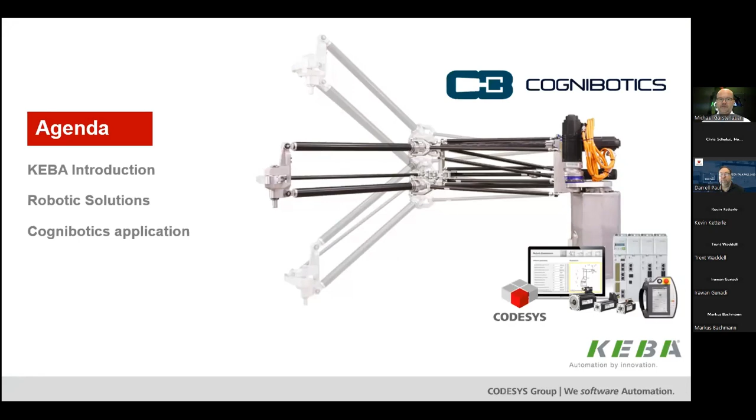So without a repeat of the introduction, what we're going to do today is give you a short KEBA introduction to who we are, the robotic solutions itself, which includes how CODESYS is interfacing with our control system around robotics. Then we'll get into the actual Cognibotics application and how we helped this customer be successful within robotics with our capability and CODESYS.

KEBA has actually been around since 1968. We export about 87% of the products we make. We're located in 16 countries with 26 locations, and we have over 500 million euros in sales each year.

The two important things we want to emphasize today are the fact that we reinvest our revenue at a rate of at least 13% in R&D each year, because this is what helps us live by our logo under KEBA: automation by innovation. This is really what brings us together as a team and a company. And second, KEBA is 2,000 employees strong, and the combination of those two things allows us to do a lot of nice things in the market, which you're going to hear about today.

In terms of robotics itself, we've shipped about 110,000 robots worldwide that run on our technology. We've been involved specifically around robotics for 30 years. Just this fiscal year, we believe 23,000 robots have been shipped with KEBA technology on board.

We partner with international robot manufacturers and process experts, which we'll share in the next slide. But the major thing that motivates us is that when you look at automation and the factory floor today, there's a lot of challenges around mass customization, individualization, high mix production environments, labor shortages, and how operators are interfacing both with machines and robots today. It really makes a challenging environment, and we believe that what we are doing is going to help that.

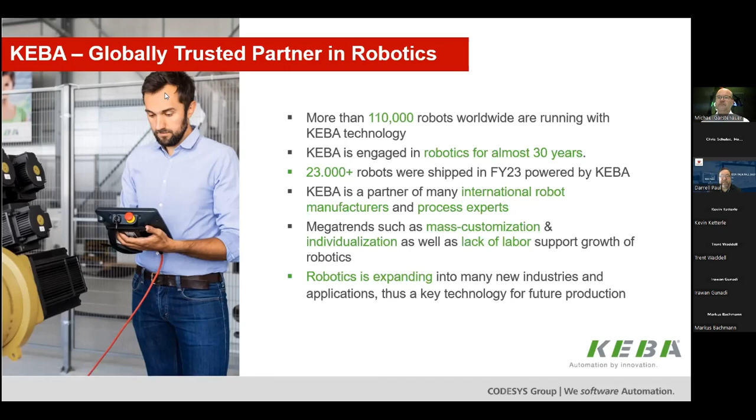And so we continue to invest in robotics and expand our capability and technology in robotics.

But we certainly want to continue to educate and share with North America who we are, probably a little bit more than I think people were aware of.

Just to give you a quick run through of what KEBA makes: one of our major products is our HMIs, with both stationary and mobile HMIs. In today's environment with robots and operators having to be very highly mobile and interface with many control systems, this is why we think it's been very popular for customers to start using mobile HMIs. KEBA has the only kind of solution for that which has properly gone through a safety rating process so it can operate safely with both robots and machines.

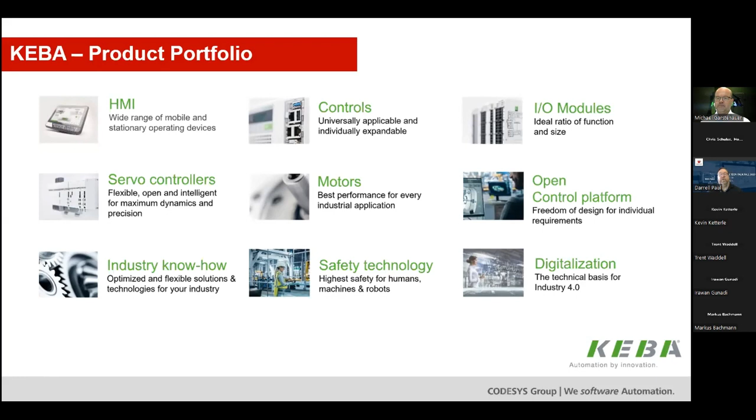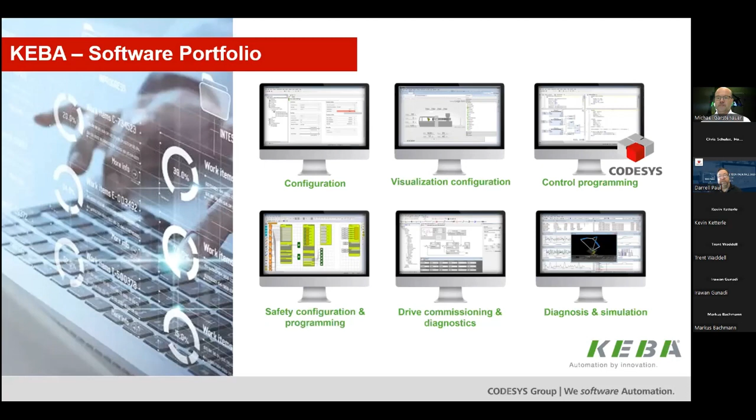So what does that mean in terms of software and the product portfolio of KEBA? Within our software suite is CODESYS, but in conjunction with CODESYS we have a lot of support programs that build it out to a complete suite. There's a configuration capability that helps you configure which targets and devices, controllers, motion products, sensor products, and networks. There's also visualization for building user interfaces, control programming which includes CODESYS, safety programming, and drive and motion control diagnostics, along with simulation and real-time digital twin capability. You'll be seeing that very shortly.

In terms of our robotic solution, what are we providing? We have a controller and drive rack all in one, as you see in the image. The first module is the control module, then we have a central power module, and then modular drive units. We can connect these to motion axes and to robots, allowing us to control those robots, including the safety capabilities and monitoring across that robot. It also lets us teach in the moves of the robot and the sequencing, and provides engineering tools around simulating a robot and running through different operation scenarios.

Within this architecture, it also provides better scalability for the customer. Most robot controllers give you one big box that controls one robot, and sometimes you can network those robots together. But with our solution, you can add on additional drive modules and control multiple robots within the same software project. This allows much better functionality and coordination across the robots, even coordination with the machine and motion systems, and you can control multiple robot types. So it provides a good, flexible, scalable solution for customers.

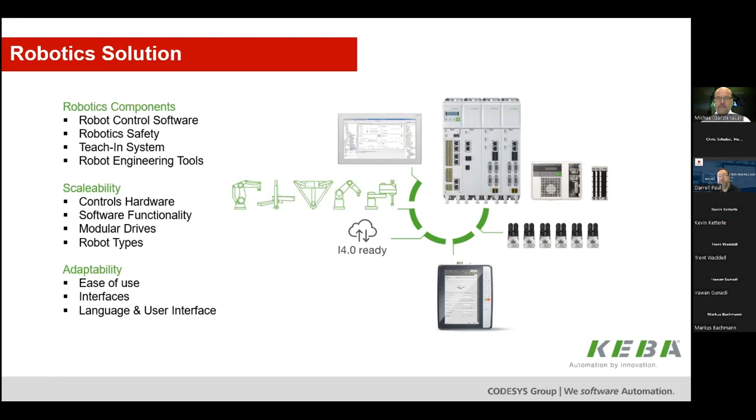From an adaptability standpoint, we really focus on our software capability being ease of use. We're implementing more and more capabilities of what people are calling programless code, or more visual-based programming, and we continue to build that out. We have multiple ways to interface with products on the machine through control networks and systems above the controller in the IT space, and we also support multiple languages and multiple user interfaces within our software package.

So what we're going to get into now, which leads into Michael's presentation, is the key capability of KEBA, what we call our FlexCore technology. We have a Linux real-time engine, and then many different types of modules that feed into this real-time Linux engine for machine control, robot control, and CNC control. This is where CODESYS comes into play, because CODESYS fulfills that PLC block you see in the diagram. With this, you can control up to 30 different types of robots, or even custom configured robots, and you can program and control up to 16 robots in one controller, which is a phenomenal advantage that KEBA has.

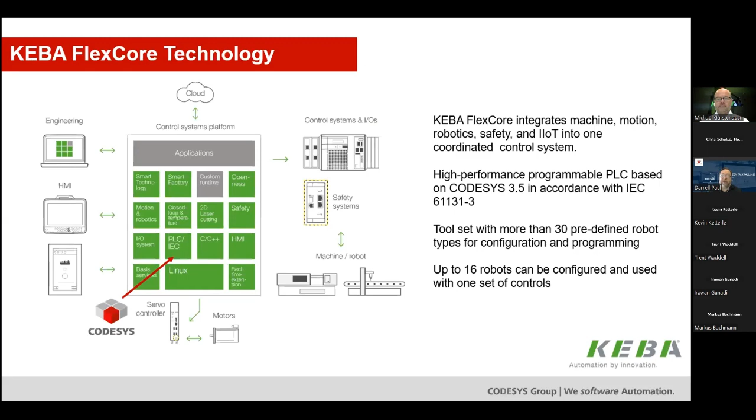The next part here is safety, because whether it's machine safety, robot safety, or motion safety, we really cover the complete spectrum. We actually bring those safety systems together so that if you have multiple robots, motion axes, or machines, it's a cohesive and coordinated safety system. We provide safe motion in terms of force, speed, position, acceleration, and recovery. From a robot perspective, we support safe area functions, safe planes, and safe TCP actions, and we can interface those two systems together so they form a coordinated safety system. So safety is a big part of what we do across all our technologies.

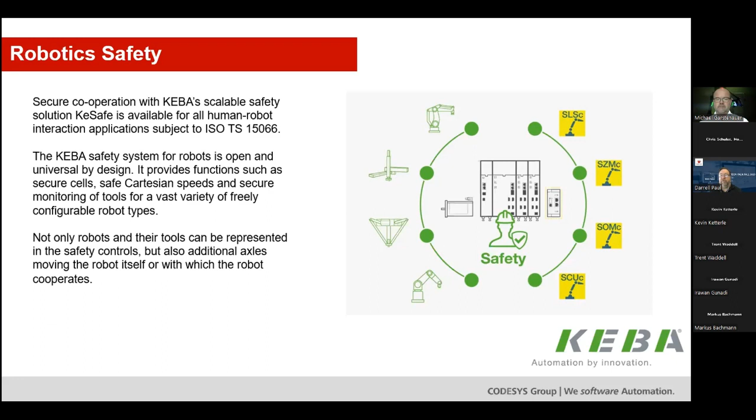All right, so this is the part where I'm going to stop here, and I'm going to let Michael take over, and he can show you all the fun stuff.

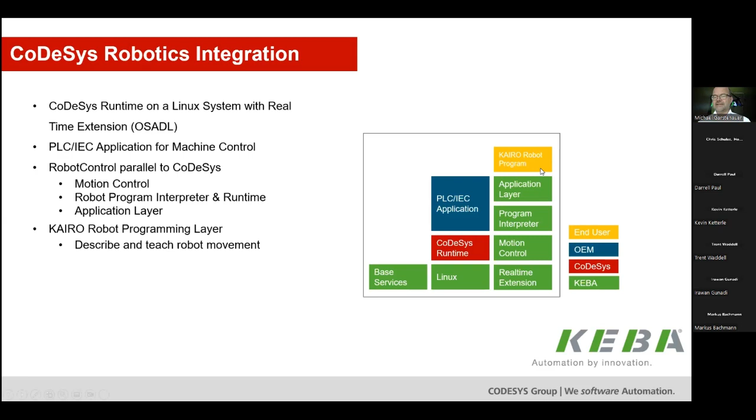And there's an application layer that allows you to define the language that we provide. Basically, we have this end user level. If you're familiar with a standard industrial robot and languages like Rapid or KRL, this is a comparable language.

The difference there compared to a standard industrial robot is that, as an OEM, you can change the application layer a lot. You can change the types of commands that are available. You can add commands that integrate your process technology, and you get an integrated representation of robot motion and process settings.

Also, you can integrate your own transformation within the motion control, and you can have all kinds of adaptations to the interface between the PLC side and the robot control side. And for the high-end geeky ones, there's of course a real-time C++ environment available for integrating deep technology on the same platform. This can also be accessed from the PLC side, and the C++ part can interface to the robotics.

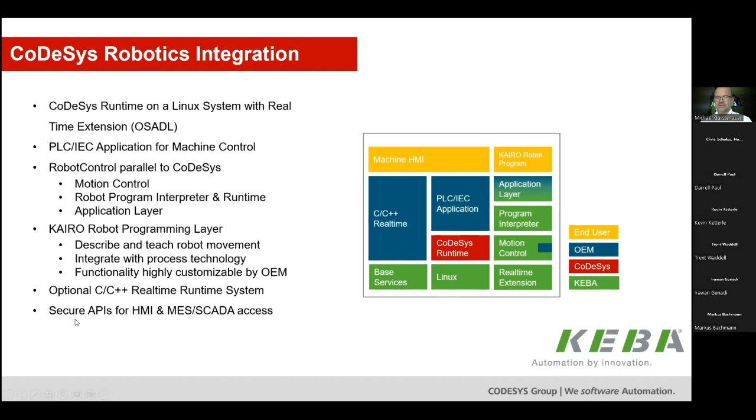So many functionalities available. All of this comes with a lot of APIs to access from outside, from higher level systems or HMIs. We are right now in the process of switching to web-based secure APIs.

So how does this compare to a regular PLC plus industrial robot setup? Typically, that's how industrial robots are deployed in most installations. There is typically some kind of field bus or network interface between the machine PLC and the industrial robot controller. We enable a more integrated approach where the machine control, the robot control, and the process control can be done on a single integrated platform.

What are the challenges of the common approach? On the one hand, you need to synchronize data and you need to manage data. For example, if you look at clouds or tool environments, you have two that have to be consistent. All the data coming from part information from your ERP system needs to influence both parts, both the PLC part and the robot part, and they might have very different interfaces and very different access possibilities.

In our system, you have one single access for all the data, for process information, for the robot parts, as well as for the overall machine workings. This is really integrated and unified, much easier to handle.

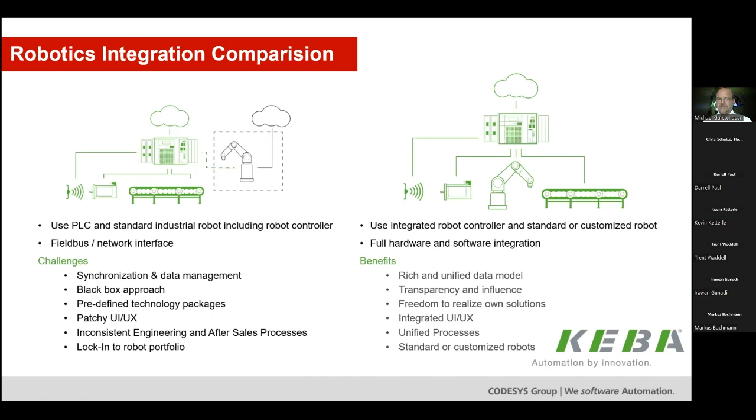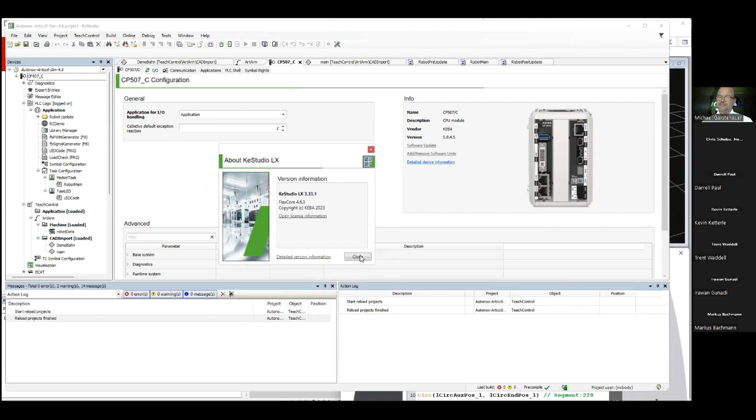So many more opportunities and possibilities to make life easy, flexible, and all the processes much simpler than in regular installations. So what does this all look like? I'd like to give you a live demo. The entry point for an integrator typically is KeStudio, which is our environment for programming PLCs, the PLC part and the robot part, and handling the entire system. So if you find this somehow familiar to what Kevin presented, this is not happening by accident.

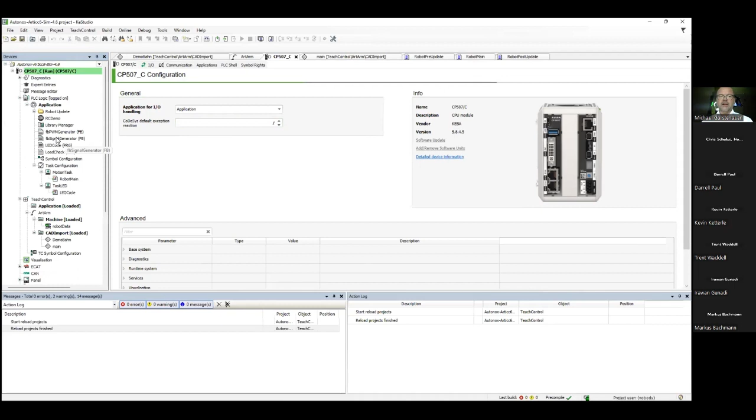This is based on the CODESYS platform. If you're familiar with CODESYS, you will find it very easy to start here. You can program just your PLC code as you're used to with many other systems.

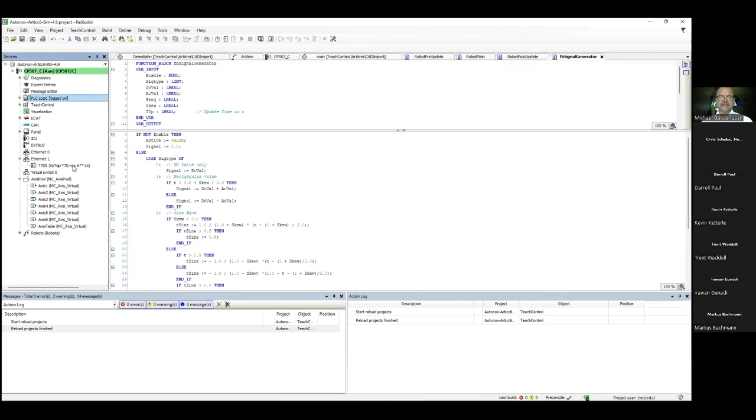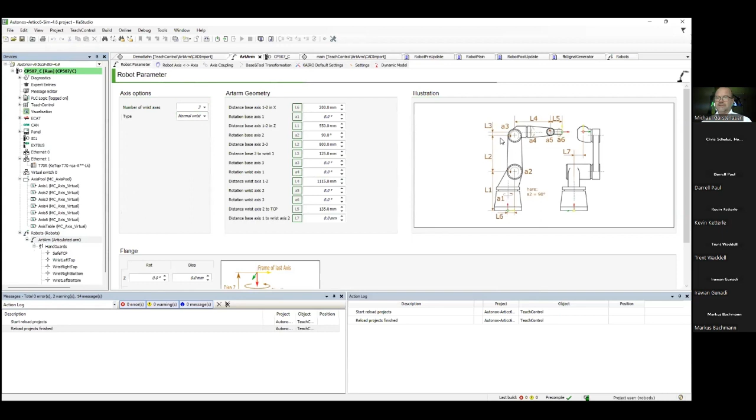What we have integrated here is a robot configuration, so you can define what kind of robots you want to run on your system. You can, as Darrell explained, install up to 16 robots on a single controller and define all the parameters that are required for this robot — for example, the dimensions, the type, the assignment between servo drive and robot axis, also dynamic properties of your robot such as center of gravity, inertia moments, and so on. So you get an object, which is your robot.

You can have all kinds of drives and peripherals, IOs, interfaces to higher level control, and so on. How is the robot operation and PLC interacting? There are several libraries that allow you to interface between the PLC part and the robot part, and also the update of the robot, of the motion planning, and of the program interpreter is controlled out of the PLC environment, which means that you have full synchronicity between all the real-time data in your PLC and the robot.

So if you want to, for example, have a moving object, you can process the movement, read it out of some sensor, and put it into the robotics kernel within the PLC application.

Also, the operation of the robot is controlled fully with some libraries. This means that you can choose and define your own states, your own modes of operation. There's lots of libraries involved and access to that, and there's some standard interfaces already present. If you need more, it's very easy to add more information and more data exchange between the PLC side and the robotic side.

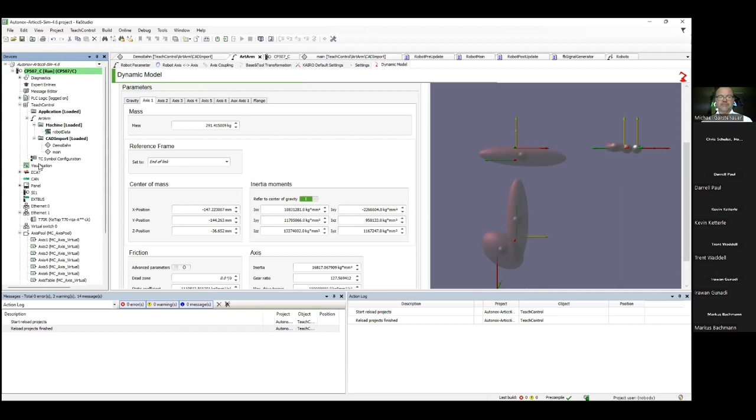What else did we integrate? There's also a program interpreter, a program editor for our language, the KAIRO language, which is fully integrated in the environment. You can write your robot programs right in the KeStudio environment and download this to the robot controller itself. So if you're done with configuring, programming your process part, and programming communication, you just download the entire project containing configuration, PLC code, as well as some programs.

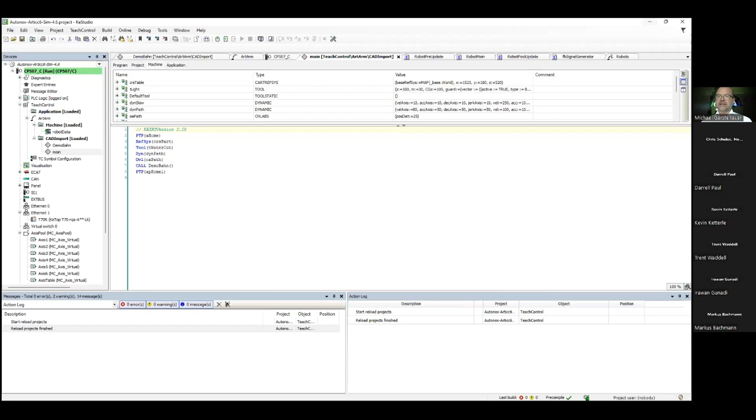Either you download it to a real controller, or we provide a digital representation, a simulation of a controller, running on my laptop. And I can show you how this looks.

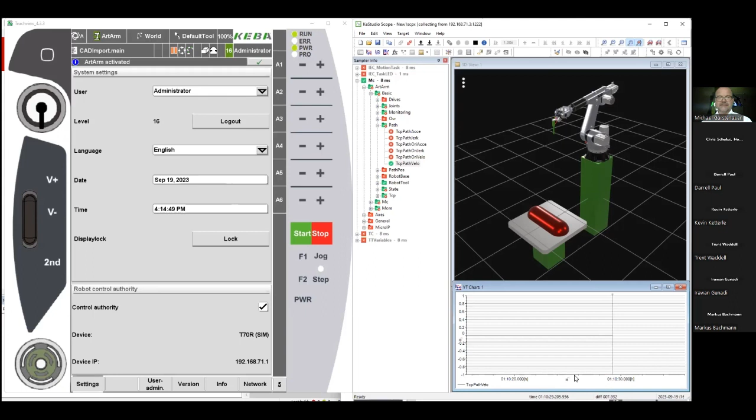Basically, we have an environment that represents our teach-in system, our mobile handheld device, as well as a digital twin, a scope that has a 3D simulation, 3D model of the robot, as well as all the possibilities to analyze all kinds of signals that happen within the PLC side or on the robotic side.

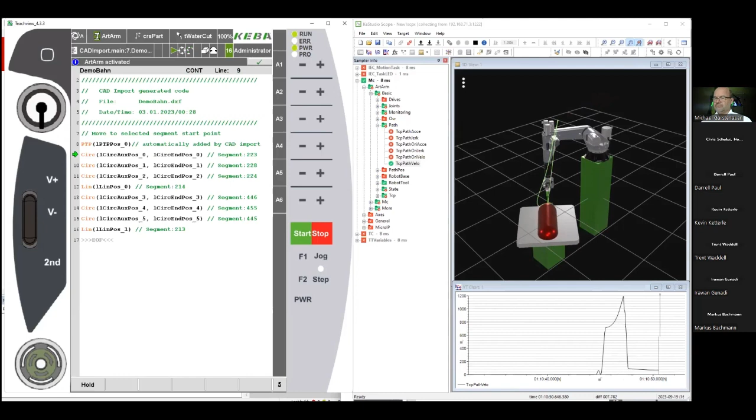We can now look at such a KAIRO program here. I can just open this, and then we can start executing it. And you see robot movement as well as process data. In this kind, it's the current path speed of the TCP, all integrated in this view.

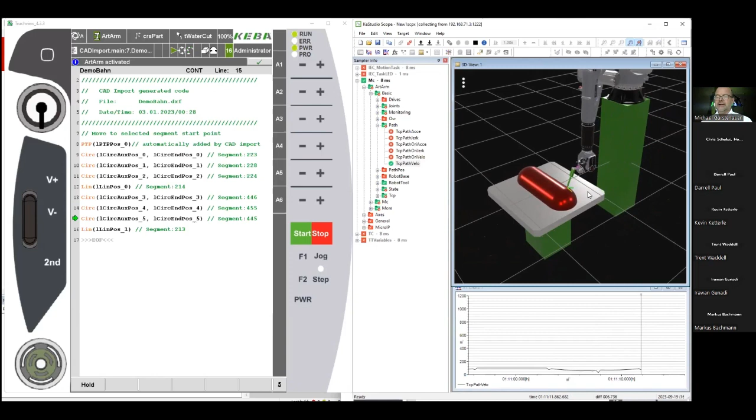This is typically how OEMs are developing their technology and their technological solutions within our environment. So you can see here, for example, the path of the TCP available for later analysis.

This can also connect to a real-life controller, and then you can do the same when operating a real robot as well.

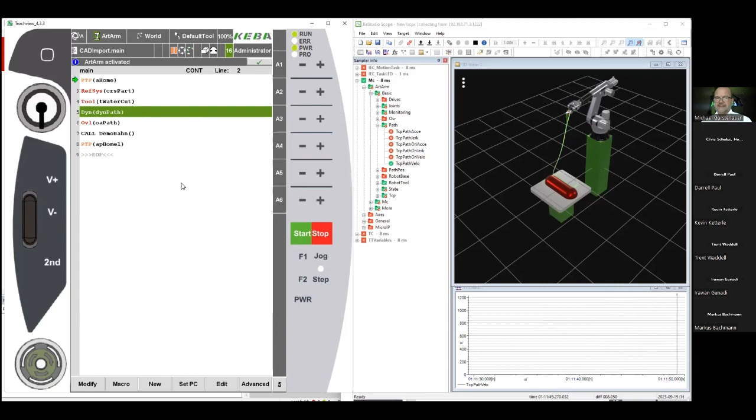Here you can see this KAIRO code. This provides all the necessary teach-in functionality. You can jog the robot, you can teach the robot. This looks very much like a standard industrial robot, but it's highly customized on the same side.

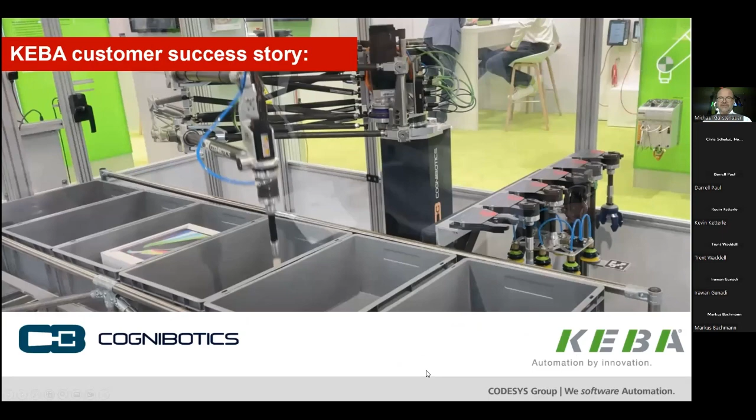So let's continue here. Just to demonstrate what our customers are typically doing, I would like to highlight this story of Cognibotics, which I find quite interesting. Cognibotics is basically a technology company founded around 10 years ago, and they have lots of robotics know-how, and they came up with a few good ideas about new application-specific robot types. One of them is this HKM with the main slogan of reach and speed.

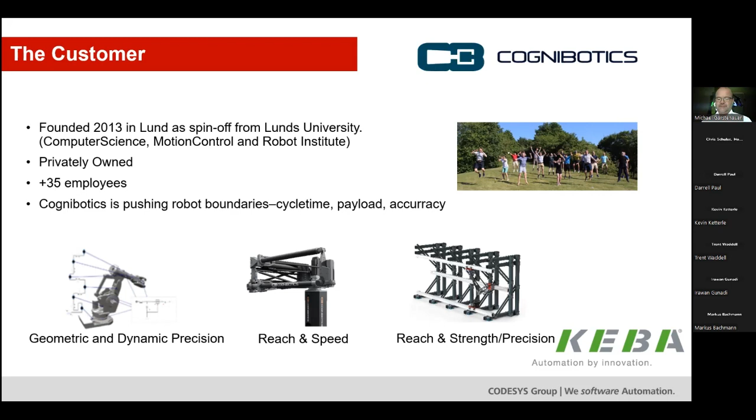About a year ago, they contacted us and said, we have this very nice robot, but we really need an industrial, mature, capable robot controller. And we were the number one choice.

So what is this HKM good for? Basically, it's addressing intralogistics, especially handling of single items. Intralogistics, if you look at this, online e-commerce is growing, online orders are growing. The shipment of pallets out of warehouses is reducing a lot, and single shipments are increasing a lot. This means that many more orders have to be processed, and this needs automation.

But if you look at the state of the art of robots, I think that's already common in many warehouses. The first choice that many people make is just add a cobot here instead of this person. But when people do that, they find out that the cobot is so slow compared to some trained and quick human, that basically the business case is not there, and the performance of the entire warehouse is decreased.

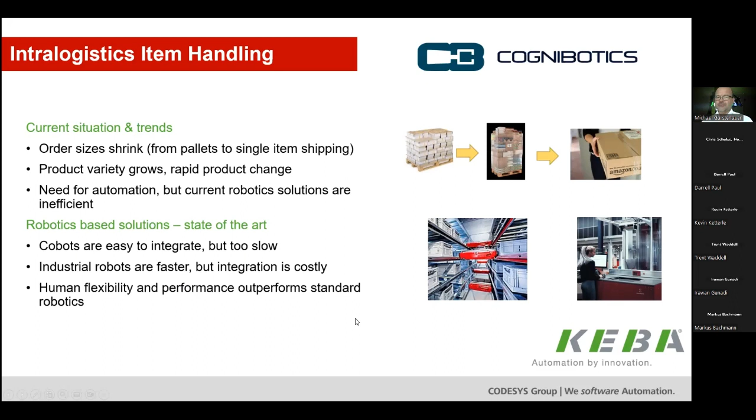You could use industrial robots. The integration is getting more costly because you need all kinds of safety equipment around it. Industrial robots are a bit faster, but compared to humans, basically there's no way. Human flexibility and performance just outperforms any approach with a standard robot so far.

So when you look at robot types, there's robot arms ranging from your little 4 kilo, 600 millimeter, to a series of cobots, to very large robots that can be used in warehousing. And if you have some palletizing applications, that's basically the right machines of choice. Also, if you have large orders, these gantry systems are quite common.

In the industry, especially in packaging, pick robots are quite common, but they lack the required reach if you go into logistics. So the pick rates would be good, the speed would be good, but the range is not there. And the HKM just fills this gap and extends the available portfolio by combining very large reach of a radius of 1.8 meters with a payload of 7.5 kilo with very high speed.

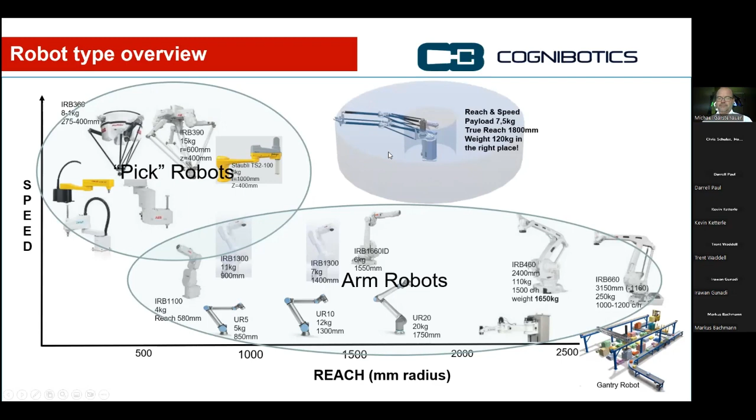So the solution of Cognibotics consists of a robot, a vision system, and the respective tools, to complete such an item handling package. Now this RVT combination can be easily integrated in all kinds of intralogistics systems because of this large reach. The vision system is driven by AI and is typically automatically learning how to grasp different items. It's also improving over time, so this can give a very reliable system.

The tools, of course, the performance of the robot, or of the entire system, depends on the right tools, especially what kind of totes you're using, what kind of parts you need to handle, pieces you need to handle. You need to be very flexible on the tool side as well.

Key performance figures that are now achievable: pick rates are in the order of 2,000 items per hour. This means that in 1.8 seconds, the entire system identifies a new piece, picks it up and places it to another position. The successful pick rates are above 99%.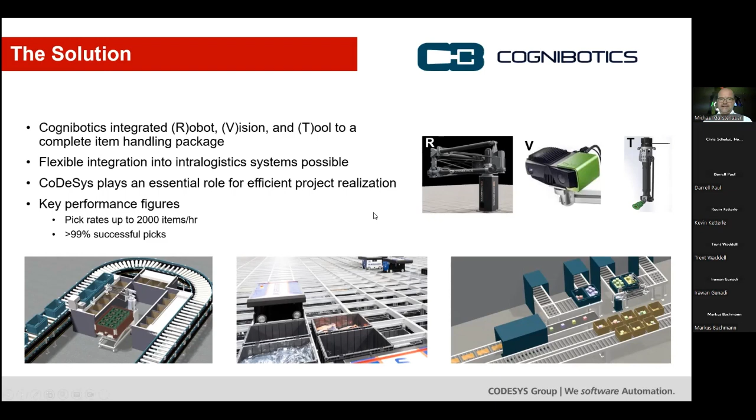And what is our part in all of this? Basically, it's an integrated control solution consisting of a CPU module, including an Intel Celeron CPU, as well as a safety module. You need to still take care of functional safety, and that's included in the system as well. We have the servo drives and the supply module available, and there's a central encoder interface to interface to all the robots' axes.

Software-wise, there's exactly the KeMotion robot control system that we have explained before. Cognibotics has integrated some C++ code with their own proprietary technology into the system in this real-time C++ part, and also interfacing with our motion controller. And of course, there's a mobile teach pendant for commissioning and teaching positions.

The key features: transformations are integrated by Cognibotics. Also, some motion control optimization is integrated. Vision and tool changer, that's a typical task of CODESYS.

We use the flexibility and versatility of CODESYS as a central platform for data handling with the internal and external world. Also, the interface to warehouse management and the main plant controller, a typical task that is implemented in CODESYS. And this is also something where the easy programming of CODESYS is of high value. And of course, functional safety is mandatory and integrated in this entire system as well.

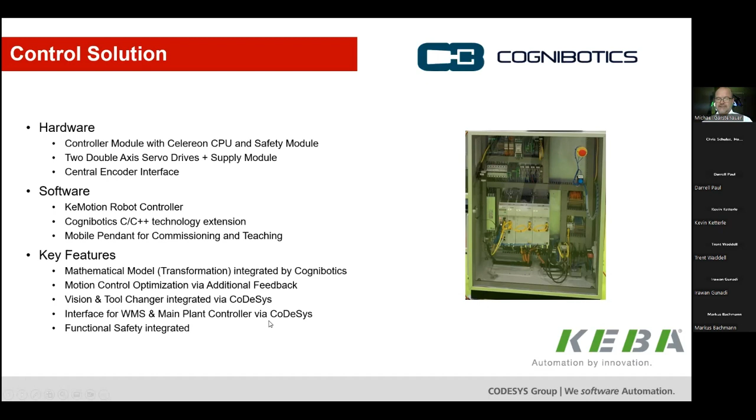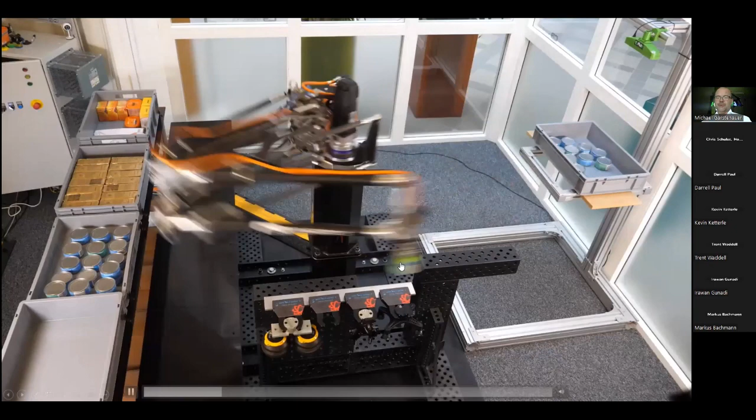So how does this look like? So the robot is some kind of hybrid, and that's why it's called hybrid kinematics, between a delta robot and a SCARA robot, taking some features from each. So it has parallel moving arms, but it does not require the full envelope of a delta robot.

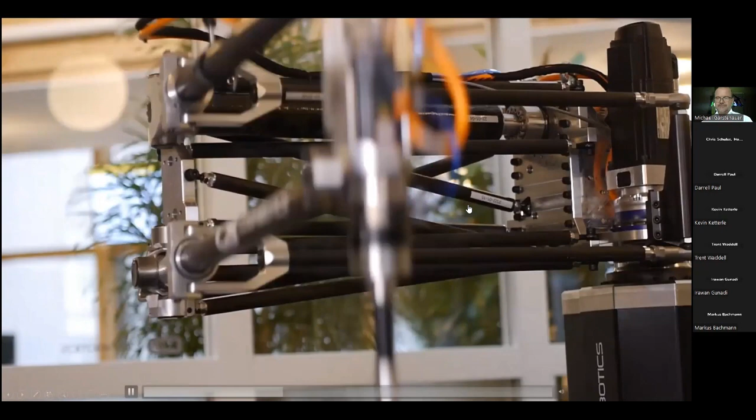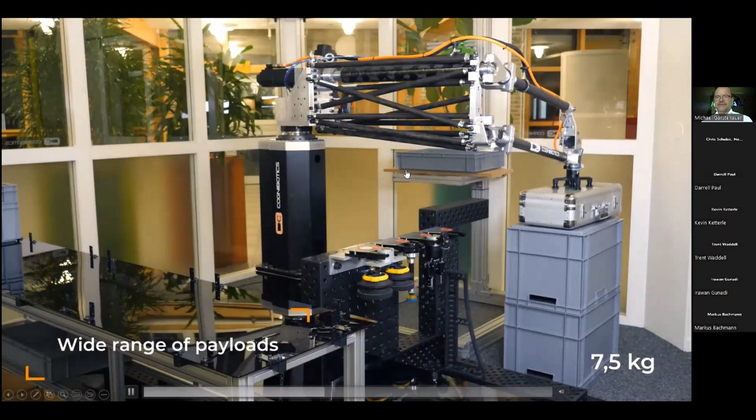The key design feature is that all motors, all heavy elements, are located at the center and are barely moving. So everything that's moving is very lightweight. And this is why it's able to achieve this performance data.

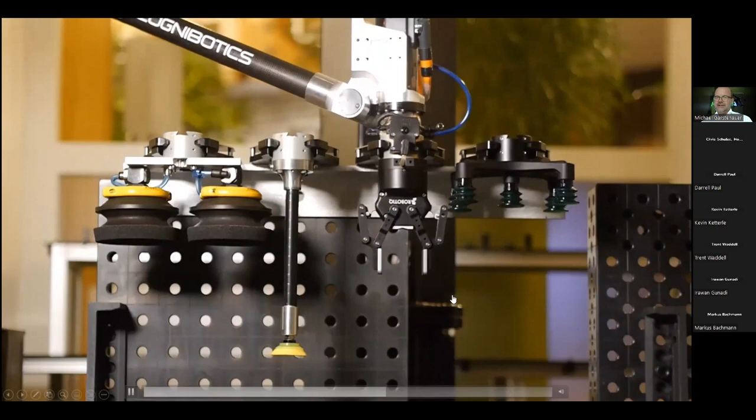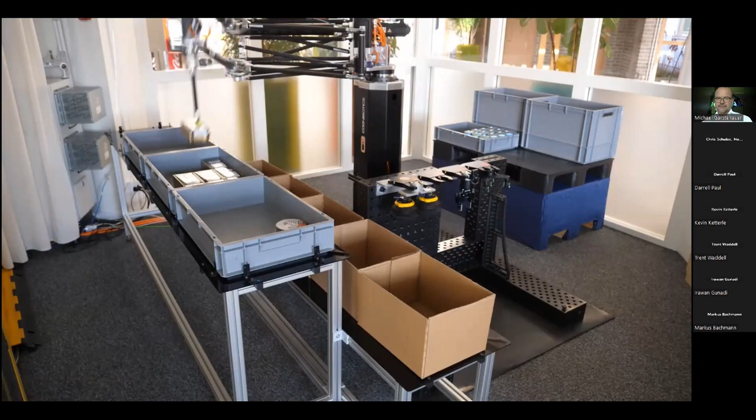So this is a typical example that there are still opportunities for application-specific robot types. And I hope we can inspire some of the participants to think about what can be done with either a customized robot type or by using standard robot mechanics and integrating processes much better than in the regular way.

So what's the summary and conclusion? With this deep robot integration, you can integrate the machine operation, the robot operation, and technology control on one platform. It's highly customizable for specific requirements, and you can achieve data consistency across the entire project and handle projects very efficiently and reliably across the entire life cycle, from the bidding phase down to after-sales service.

So what's the benefit for the OEMs? Our OEMs are very flexible and have lots of opportunities to integrate their own core technology together with the flexibility of our robotic systems. Very efficient and consistent project realization.

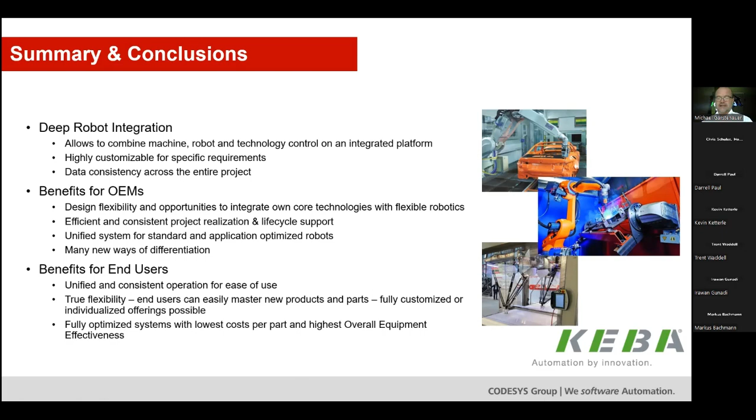So we hope that gave you some impression about the possibilities and potentials of integrated robotics, and I would like to thank you very much for your attention.